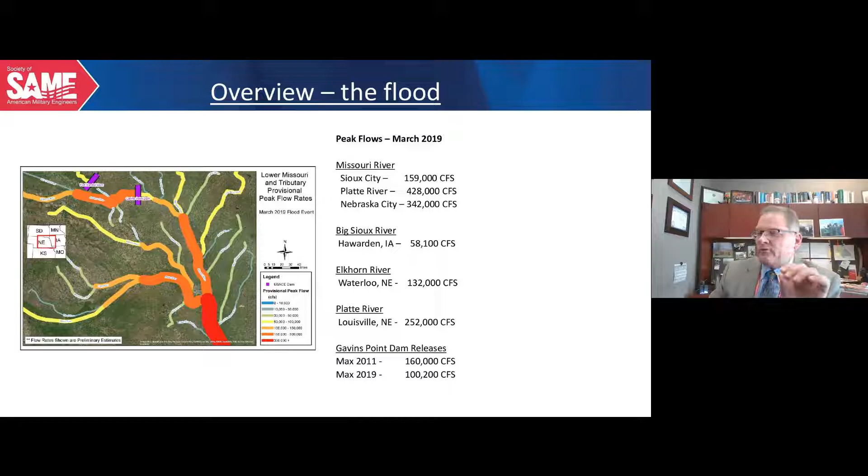The releases from the Gavins Point Dam up in South Dakota, which is the furthest south dam of the 6 main stem dams on the Missouri River, they peaked at 100,000 CFS. In 2011, they ran 160,000 CFS for months on end, but they're two very significantly different flooding events. The 2019 event was driven by unregulated flows in the tribs south of the reservoir system in Montana, North Dakota, and South Dakota. 2011 was largely an upper basin precipitation event where we maxed out the capacity of the reservoir system, a little over 63 million acre feet of runoff during that year, highest runoff year on record. 2019 was just behind that at 62.8. So basically the same amount of flow, but a significant amount of flow downstream.

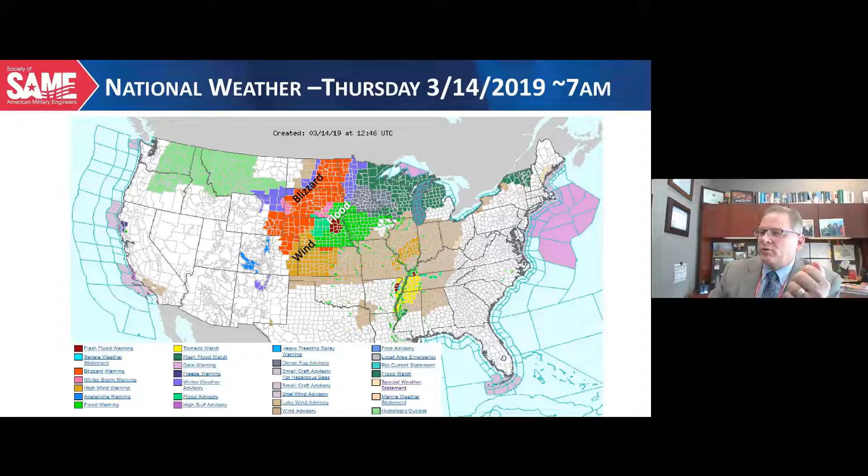This is going to kind of set up the precipitation event, and you never let a good event go by without coining a new word that you're able to apply to it. But this, we ended up with rain on top of frozen ground, on top of snow, the further north you got in our area of responsibility. And it ended up being what was affectionately termed as a bombogenesis by those people within the weather forecasting purview. So you can see, I guess some would call this a beautiful picture. I call it kind of ominous and frankly a little bit scary.

But as this weather track came up across the western part of Nebraska, saturating the frozen ground with upwards of 3 to 4 inches of rainfall. And then across the state of South Dakota, we ended up with significant bands of heavy, wet snow, all courtesy of starting on the 13th of March. I can remember on the 12th of March, Tuesday, the forecasts were, well, we could see a moderate increase in stage on the river systems.

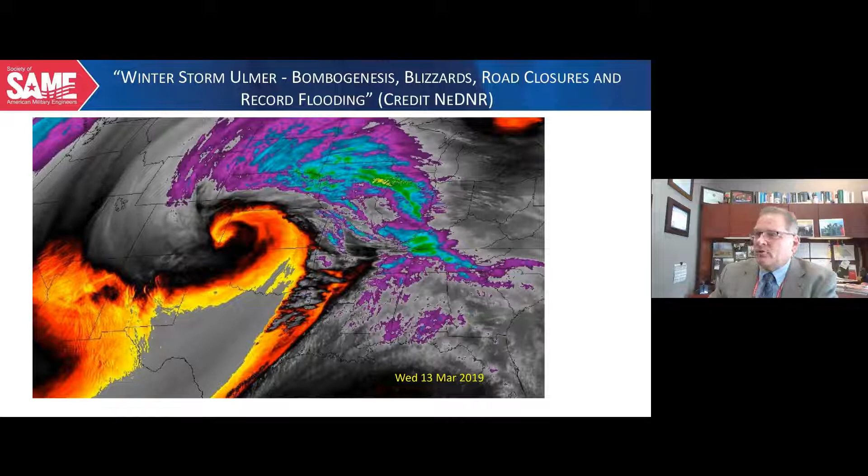And that dramatically changed over the course of about 30 hours, where we transitioned from it shouldn't be too bad to what became a very cataclysmic and just a catastrophic event that heavily impacted to the tune of nearly $1 billion worth of damage within a multi-state area.

This provides a QPF of the 3-day precipitation across Nebraska and South Dakota. You can see the dark tans are really indicative of a 4-inch amount of precipitation over very large areas that ended up providing significant inflow into the Missouri River system. Interesting to note that during the event, with the main stem dams at our disposal, we were able to terminate flow at Fort Randall on the Missouri River in order to try to mitigate and reduce the risk to the downstream event that we knew was going to be coming in through all the unregulated tributaries.

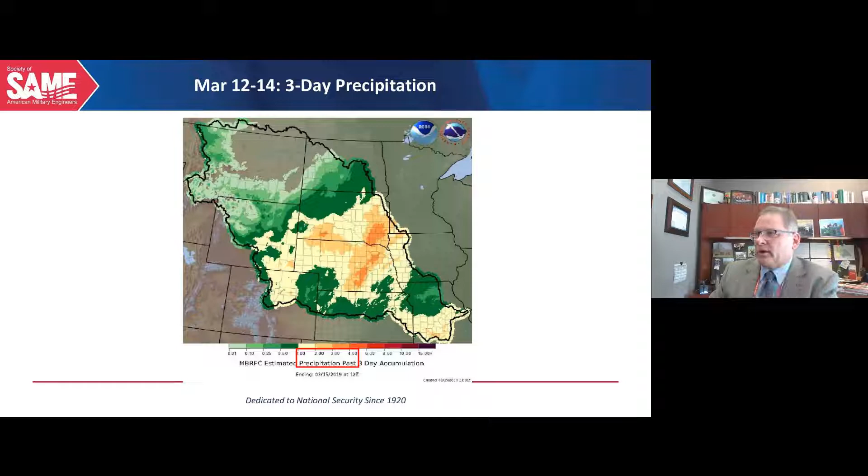So at Fort Randall, we minimized the amount of flow to zero, and then the rest of the flow was driven by the tributaries that came into the Missouri River system. So Ted? Yes, go ahead. You have the ability to shut off the Missouri River. Yes, we do. That's through those main stem dams. It's something that is very atypical. We've probably only done that during my career maybe twice.

It's not something that's obviously routinely considered, but this was I guess the classic event where downstream flows, our inability to control the flow in the Platte, the Little Sioux, Big Sioux, the Niobrara, forced drastic action, and we had the flexibility to be able to terminate that flow at Fort Randall. And basically over the course of the next 12 to 18 hours, you saw that tailrace from Fort Randall begin to decline and decline and decline as that flow cessation from Fort Randall began to take effect.

Unfortunately, the Niobrara flows into Lewis and Clark, which is above Gavins Point, which again forced Gavins Point to have to continue to increase flows up to that 100,000 CFS flow rate. Today's flow rate coming out of Gavins Point is around 13,000 CFS. A normal spring flow. We have transitioned to drought conditions. The irony of that should be appealing to many.

So we're in a situation now where we are reducing flows in order to protect downstream interests in water intakes and navigation responsibilities and those types of things. But we're currently running 13,000 CFS. So you transition from a system that's running 100,000 CFS to today's flow rate of 13,000. You can see why this was such a dramatic event during March of 2019. Understood. That's a factor of 8. Exactly.

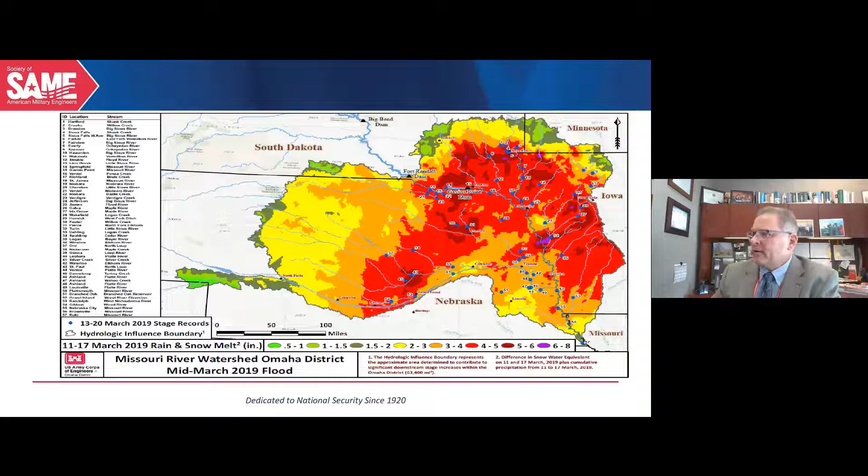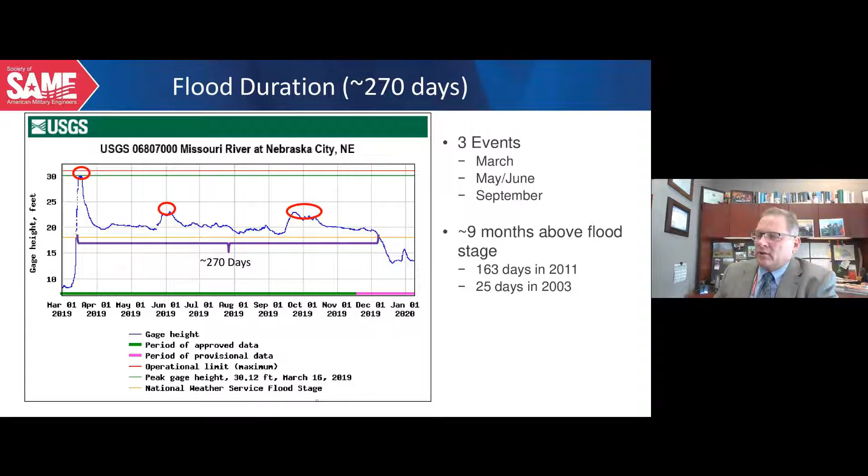And I really have to give accolades to local and state EM, to the Corps of Engineers. Certainly we were out there, boots on ground through the entirety, and many of the communities also rolled up their sleeves and they sandbagged and they provided a lot of those activities. You know, when you see water coming, it's really an all hands on deck type of situation. So now, once again, we're going to walk through and you're going to see a whole bunch of water. And really the takeaway is holy smokes.

But then I want to get to what the Corps of Engineers, what Omaha District, looked to do to try to do things differently. Breck touched on it at the beginning of the conversation. After the damages occurred, the 4 governors from the states of Nebraska, Iowa, Missouri, and Kansas came together and basically said, boy, we can't continue to do this every 9 years, every 8 years. We have to do things differently. We have to think differently. We have to think more resiliently.

And in this presentation today, I really try to focus in on some of those things that we focused on doing differently. At the end of the day, the federal government, through the PL 84-99 program, which is our opportunity to work with local and state communities to assist them in the management of federal and non-federal levee systems, we have a commitment to them that we very quickly work to repair damaged systems. And there's benefit cost ratios associated with that. There's a responsibility to be prudent stewards of the tax dollar.

Within that background construct, we're being pushed by the 4 governors to be able to do things differently and work within the construct of national law in order to get after that. So we had some great successes. We'll walk through those. I'm sitting up here in the green area, Omaha, Nebraska. Above Omaha, we did have some residual flooding, but it did not overtop the levee systems.

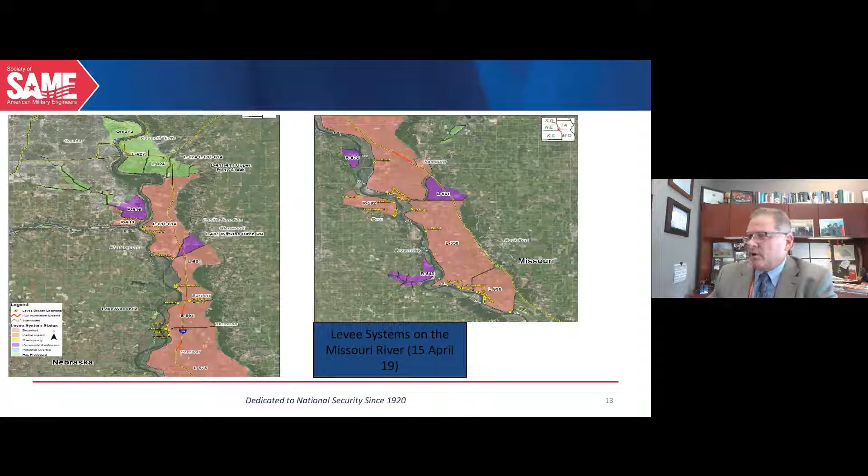So over the passage of time and months, this water flowed north to south and ultimately came out in L536. So for L536, we made a deliberate decision to pause for the better part of a year while the system was allowed to drain.

So I'm going to pause a little bit here and talk about some of the challenges, some of the impediments, some of the commitments that the Omaha District made as we met with the governors and really tried to focus on some of the pragmatic realizations. You're looking at people's livelihoods. You're looking at a lot of agricultural interests that were very negatively impacted. We'd just come out of the flood of '11. That was very catastrophic as well.

So within the ag community, between the 1st and 15th of March is an important time frame. That's when ag producers working with their insurance carriers really have to have the crop insurance defined. And if there are holes in levees, you can imagine that impacts insurance rates for that ag producer. So our commitment as we walked into this, and again, the water is still at the top of the levees. You really can't strategize and determine scope and extent of damages.

But walking into it, we said, you know what, within a year, we want to be in a position where all of the breaches, not only on the Missouri River, but also on the tribs. We had significant damage on the Elkhorn, on the Platte. We had damages across a vast swath of area that we were responsible for working with those sponsors to effect repair on. But with that being stated, our incoming goal was to ensure that we had the levee system plugged so that on the 1st of March we would have some level of flood protection.

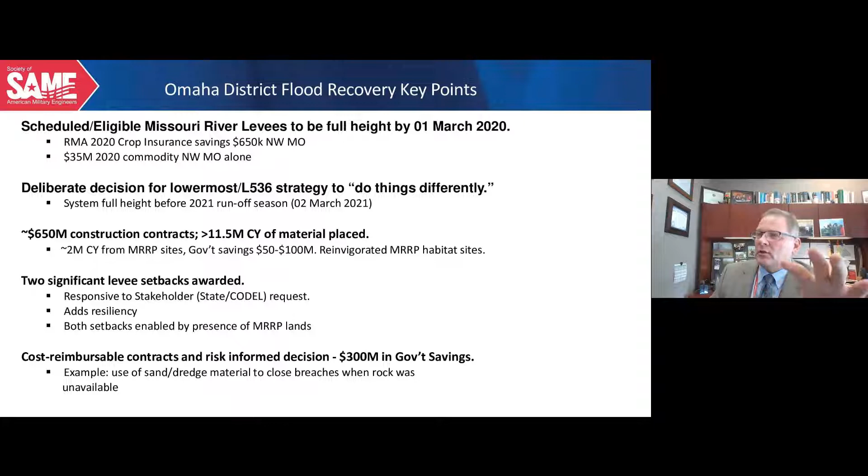Typically, within the federal government, you don't say use of cost reimbursable as a cost savings measure. Usually, it's been my experience over my career that when you get into an emergency and you're using a cost reimbursable vehicle, cost is secondary towards addressing the significant risk that is at hand. In this case, however, we were successful in using that tool rather than a traditional firm fixed price contracting approach in order to save the federal government money.

And then a lot of times when you have breaches to be plugged, you preface the breach with rock before you place material over top of it, cohesive and non-cohesive materials. Rock was a big problem. As you can well imagine, while we got hammered with our levee system, a lot of other industry, Department of Transportation with roads, we had heavily impacted interstate systems, railroads. BNSF was heavily impacted and largely bought up a lot of the local rock, which impacted our ability to go in and plug those 50 breaches.

So just a 100,000 foot perspective, in my career, we had the flood of 93, largely lower basin. We had some damaged levees within Omaha, not a significant cost. These aren't escalated costs, but still $84 million in 93, a significant chunk of change. 97 was a heavy flow year, didn't have any breaches within the Omaha district. 2011, as we talked, was pretty catastrophic.

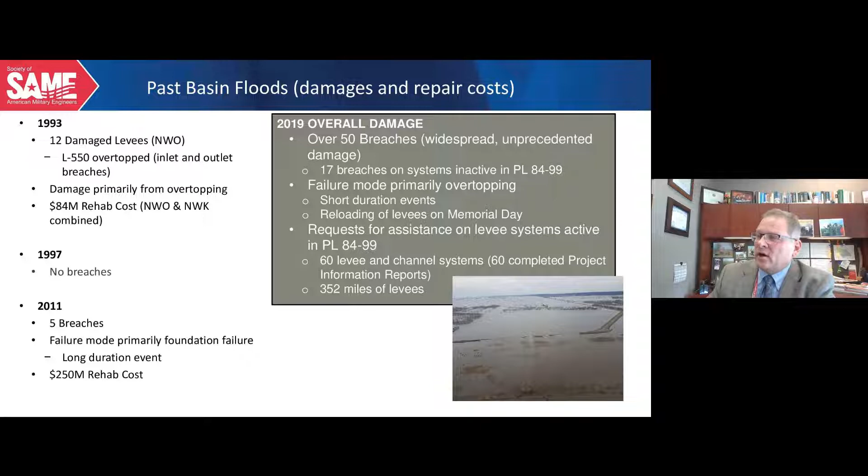Now a bunch of pictures and a bunch of gee whiz factoids. Again, you can see that this is the furthest north levee system adjacent to Omaha. It's just south of Council Bluffs, L611, 614. This is where the Platte River comes into the Missouri River. And if you look at a map, you can see it's kind of a right turn for the Platte. It says get to the Missouri, hang a right, go on down to the Gulf.

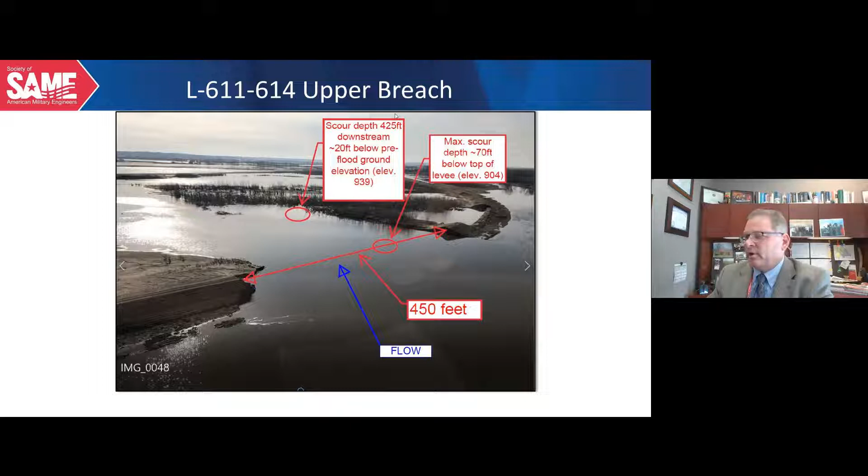Well, it was carrying around 250,000 CFS at the time of the peak point of the flood. We don't know for sure because all of the gauging stations were ripped out by the high flows, but it came powering through the Missouri and basically ripped through L611 levee system, left a lot of scour, deposited an incredible amount of material before it started making its way on the dry side, the landward side of the levee system, and proceeded to wreak havoc as it continued to go downstream, overtopping and breaching all the levees as it moved south.

Here's the initial breach. You see this kind of an eyebrow in the furthest left picture. The reason the Corps of Engineers does that is because you could go straight through, but the scour hole that is left is significant in nature, and it's easier, cheaper, and faster to make this eyebrow and put that in place in lieu of trying to pass through the significant scour hole caused by the event. Within 3 weeks of the flood event, we had already had contract awarded and contractors out there working. You can see them working on finalization and setting that breach repair in place within the other 2 pictures.

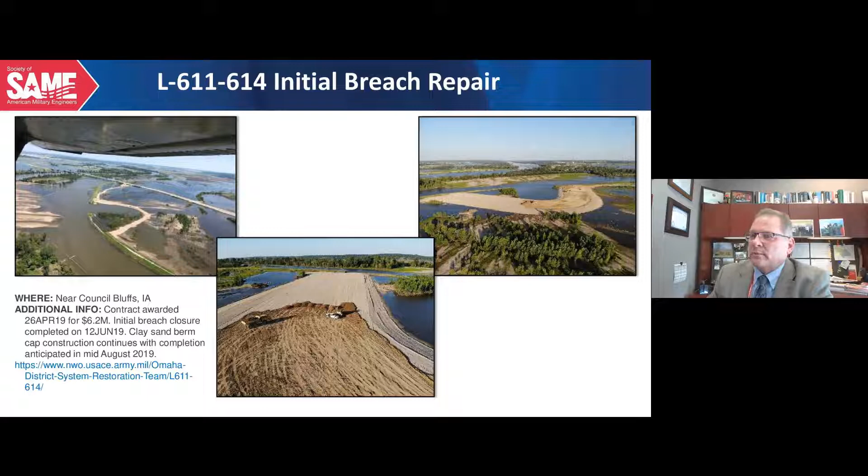Ted, you have a bunch of go-to contractors in this case then. Absolutely. See, we have what we call a rapid disaster infrastructure suite of contracts in conjunction with our rapid response contract vehicles. Seasoned, trained contractors, they acted in the prime capacity. What I find very interesting and gratifying is for this flood event, obviously a lot of significantly impacted ag community. A lot of the primes leveraged local capabilities, a lot of these local ag communities, and used their farming equipment to move the material necessary in order to effect repair.

Understood. So that was a great news story, really a win, if you can call any part of this devastation a win. It was working with the local communities and having those opportunities for them to be able to at least recoup a little bit of the damages wrought.

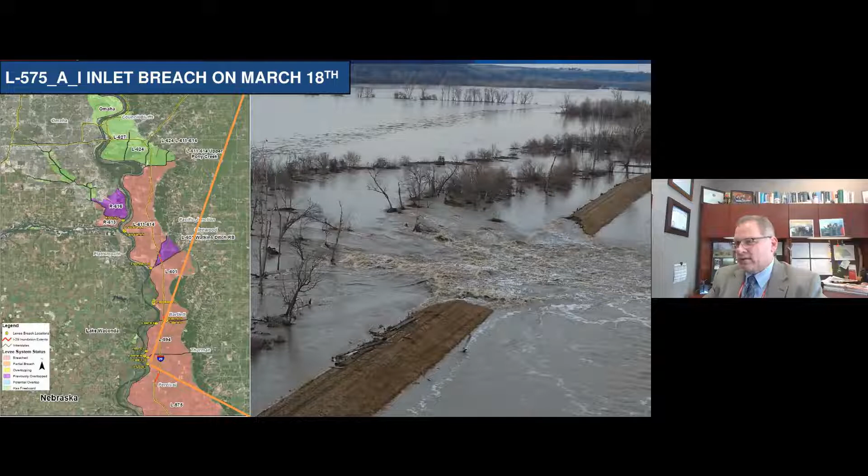You get a little bit further south, you transition from L611, 614, 602, you get down to L575, multiple breaches. In the left picture, you can see the 4 dots just to the left of Thurman. There's a tieback between levee systems at Thurman, and that's where you transition into L575. These tiebacks basically go on a tributary going up to the bluff. Both of the tiebacks were impacted and breached. So this shows a picture of some of that breach.

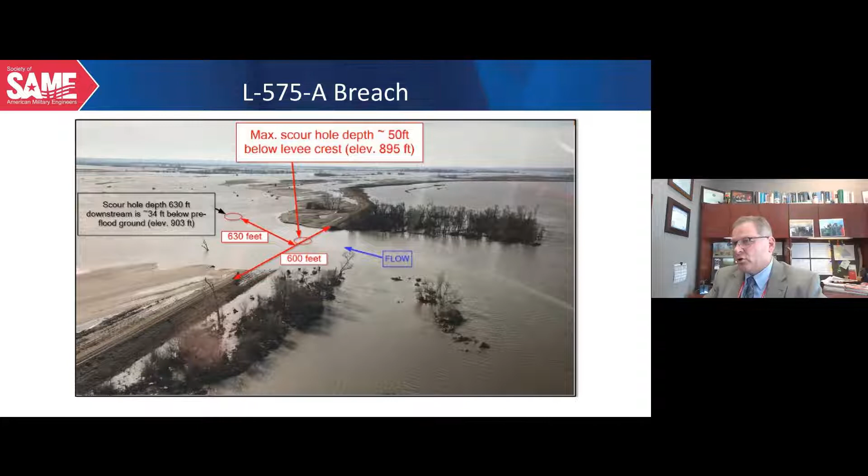You get a little bit further south into L575A breach, and again, they all got named. They were all worked on the basis of their priorities as we work north to south to try to effect repair as the system drained out. You can see in this case that scour hole was 35 feet below ground. Flow obviously coming from the Missouri into the breach, and then over the passage of time as the Missouri crested and went down, you saw the transition of flow from the dryland side out to the river.

This shows the initial repairs. The contractors are out there while flow is ongoing. We weren't in a position to wait for all of the high water to go down. We got out there and we're pushing sand and working in these communities. And it was interesting watching the final closure, because obviously you start squeezing flow, your velocities increase, and they're carrying the sand almost as fast as we were pushing the sand in. And then these sand berms are ultimately capped with cohesive material, which provided another opportunity for us to think innovatively about how do you place cohesive in the middle of winter. And we had some new innovative ideas that we provided as well.

The B breach has its own interesting story. During the peak of the flow, this B breach flow was the 3rd largest river in the state of Iowa. And when you got the Mississippi on the left bank and the Missouri on the right bank, you can imagine it was carrying a monumental amount of flow as it transitioned from the Missouri inland and then from inland back out to the Missouri. So very difficult breach to seal. Took a significant period of time.

We talked about those subsequent flood events that happened. This was heavily impacted by subsequent flood events. Contractors out there trying to seal the breach while the river's coming up as a result of significant rainfall events that occurred in the May timeframe.

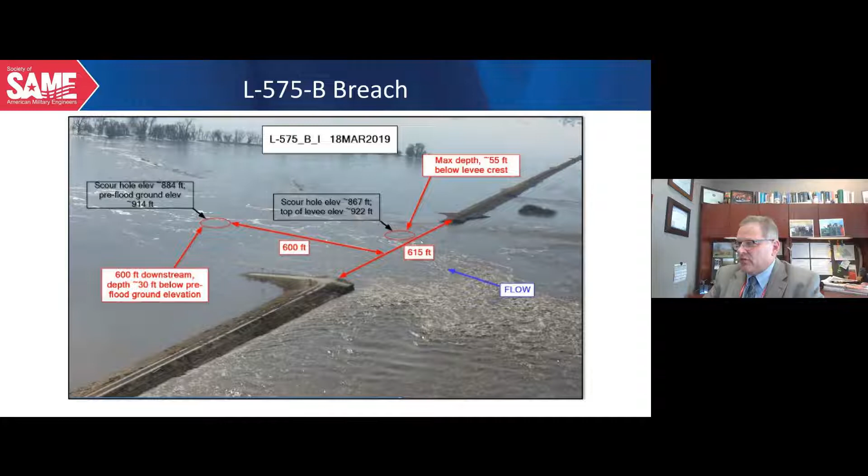This B breach, we originally awarded the initial closure in 19 April. So again, we're getting a little bit further south. This is a month after the event, and the contractor's working hard to begin the process. As you can imagine, you've got water everywhere. The entire floodplain for the Missouri River is the better part of 10 miles wide. So you basically got 10 miles of soggy.

So we ended up leveraging systems to be able to dredge and place material within the breach area from the riverside, because it was very difficult to access from the supposed dry side or land side. So this wasn't a question in many points of being able to truck in material in order to fill the breach. Some of these breaches we used dredge material, which was a very successful approach to get that initial plug in place.

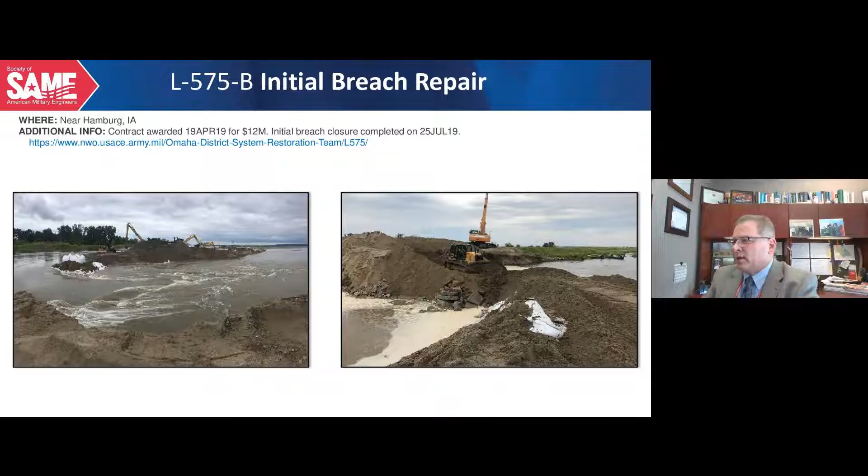Here's that final picture of the B breach, and you can see the, yes, go ahead. Basically, you took the sand that the river had spread about and put it back. Exactly. And then followed all of that up with a cohesive clay surfacing in order to prevent that sand material from eroding over the passage of time.

This B breach is kind of important to look at on the right picture. So the final flood event, the second rainfall event in September, which was incredibly wet, river's coming up. You can see it's out of its banks already, and it began to chew away at this completed breach area. So we put these chevrons and groins in place in order to reduce the energy of the flow, allow for deposition of material within those fingers in order to protect that investment of sand and time that we had put in place that would subsequently be capped during the winter of 2020 into 2021.

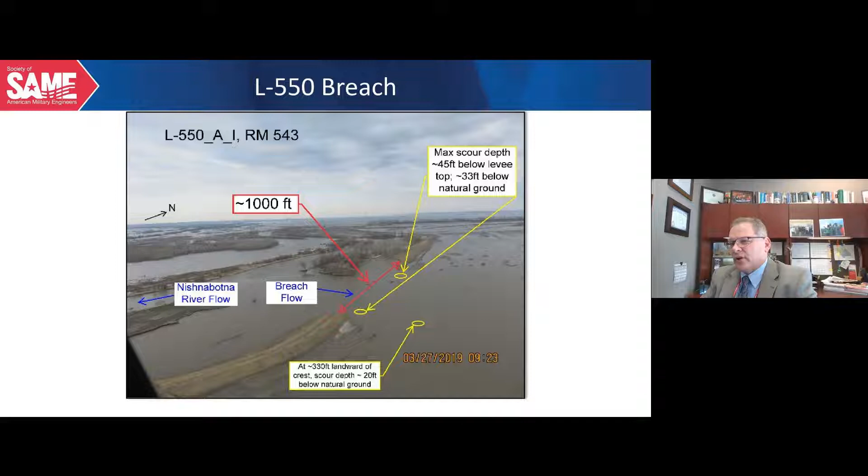We're almost all the way to the south end of the system. L550 was the second to last system that we worked, heavily damaged. We had 5 or 6 breaches just within the L550 system alone. Worked closely with state of Iowa, state of Missouri. We're transitioning into the state of Missouri down in 550. And 536 was exclusively state of Missouri. You can see, again, the magnitude of these breaches. Oftentimes very difficult to figure out what's the riverside as you look at some of these photographs.

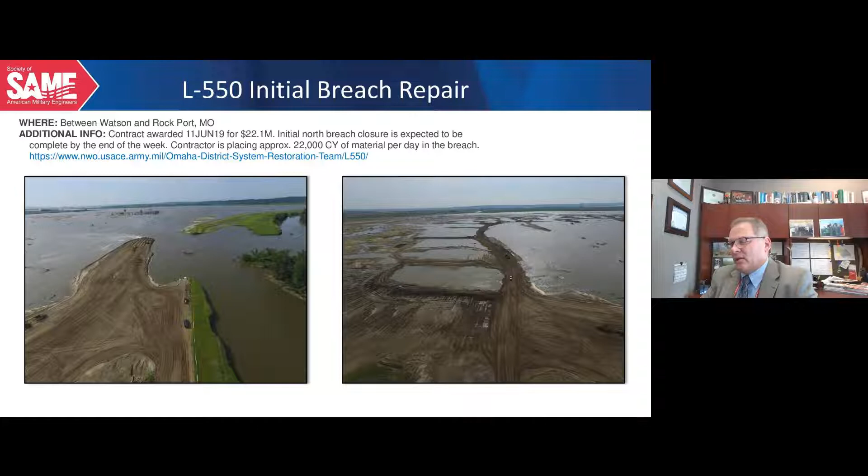Here, 550, you can see the breach repairs on the right after we've had the opportunity. And again, to travel along the crest of the levee was an adventure in and of itself. Very challenging, very difficult. You basically had to have your breach plugged in order to provide access to further south systems.

This is L536. No, it is 550 still. I'm sorry. Next slide's 536. But it shows the final area. You can see that a lot of the summer's transitioned. We're already into fall and winter. You can see snow on the ground. And once again, very proud of the fact that in 2011, we figured out that you could work in the winter in Nebraska and Iowa. We applied those lessons during 2019. It's hard to do. It's difficult to do.

We had a period of cold snap in February of 21 where we were running 10 to 15 below. And obviously, when you're trying to manage the moisture content within the clay material that's going to go on and it's all starting to freeze up, we tried to get after that through the use of some innovative approaches. We put up sprung structures and heated inside of those sprung structures and managed dirt within those sprung structures in order to make it workable for subsequent placement. So expensive, but when you start looking at time value of money and being able to effect repair quickly, vice having this stretch out over long periods of time, it became cost effective for us to continue these operations.

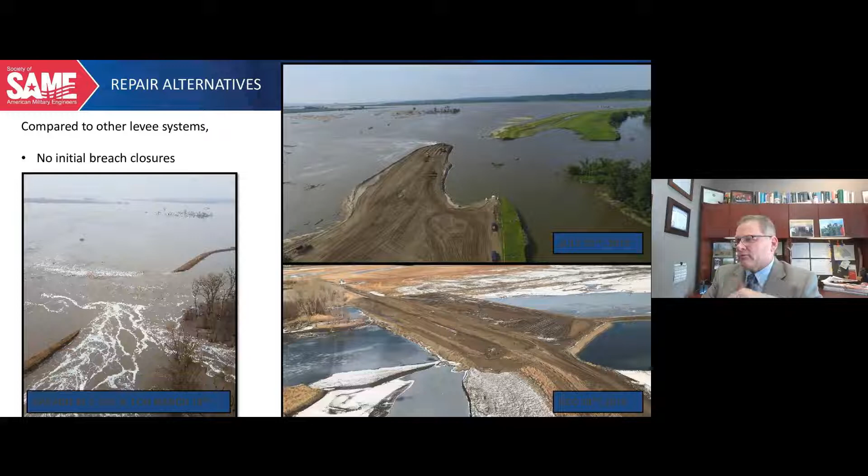Here's L536, and really it has been a poster child for a lot of success. We, in essence, moved the levee system back and allowed for the better part of 1,000 acres of what had previously been protected cropland to now be on the wet side of the levee.

And as you can well imagine, if you're the landowner who's being approached by the community or by the levee sponsor to say, hey, we got a great idea. We're talking about moving the levee back to give the river a little bit more room to grow because it failed in 93, it failed in 2011, it failed in 2019, we'd really like to try to do things differently. What do you think about us moving the levee and then you're going to have cropland that's not protected? That's not a very palatable conversation for those landowners.

So there became a long conversation with those landowners to figure out what can we do, what can NRCS do with some of their permanent wetland easement programs, what can the local communities do, what can the state do to supplement to ensure that those ag interests are not long-term negatively impacted.

Because it's been my experience that when you're on the wet side, if you're fortunate, you get a crop 3 years out of 10, because some of these areas will still be cropped. And basically the ag community is hoping that it's a moderate moisture year that allows them to be able to gain harvest, versus on the dry side, it's supposed to be one of those situations where they can count on production 10 years out of 10.

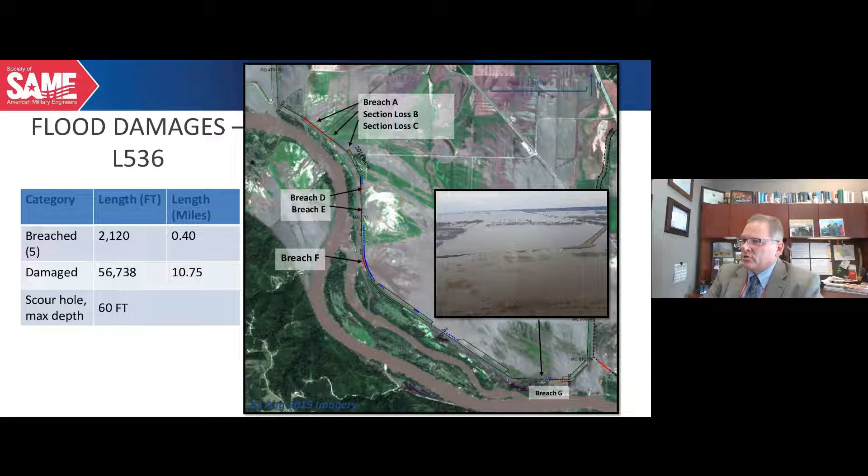And the next picture, I think, shows an overview of this offset or this setback. And on the right picture, you can see the original levee configuration adjacent to the river, tight constriction on the river, to the setback, which provided the opportunity for the river to have access to the floodway, and gives it a little bit more of an opportunity to carry additional flow. All of this within the construct of the PL 84-99 program.

The way we were able to do this was to look at the cost of repair along the original alignment. That has to be contrasted with the cost of construction for this new setback, and the costs have to be equal. You can't spend more on the new system setback than you could on the original repair. That was an important lesson learned.

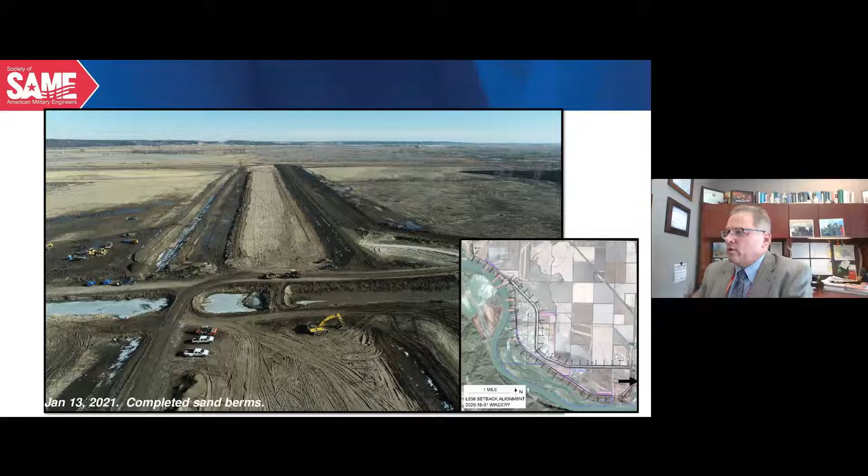We worked very closely with our higher headquarters in Washington and in Portland to ensure that we were in conformance with law and that we're meeting the authorized purpose of this levee system. And it became a huge success. Once again, working with Nature Conservancy, they did a lot of the heavy lifting, working with the ag community and the landowners, and ultimately we were successful in getting that setback.

Some more of the lessons learned. When the flood of 11 happened, it was all hands on deck. How are we going to get after fixing this? And within Omaha District, what I did is I took a cadre of staff and basically established a brand new branch within the project planning and management group that I called the Omaha System Restoration Team.

And it's a matrixed organization where I have staff from construction and engineering and contracting and counsel and everybody that is necessary in order to execute the mission had a devoted responsibility, in that case for the better part of 18 months, in order to ensure that we have provided the devoted attention necessary to accomplish a significant lift. In that case, it was $500 million.

So unfortunately, when 2019 came and the flood was ongoing, I knew exactly what needed to be done, which was System Restoration Team version 2. So we incorporated some of the lessons learned that we had gone through with the SRT. A lot of lessons learned with respect to real estate and management of real estate. Real estate is a levee sponsor responsibility, and can oftentimes be the long pole in the tent in terms of gaining access to the project site.

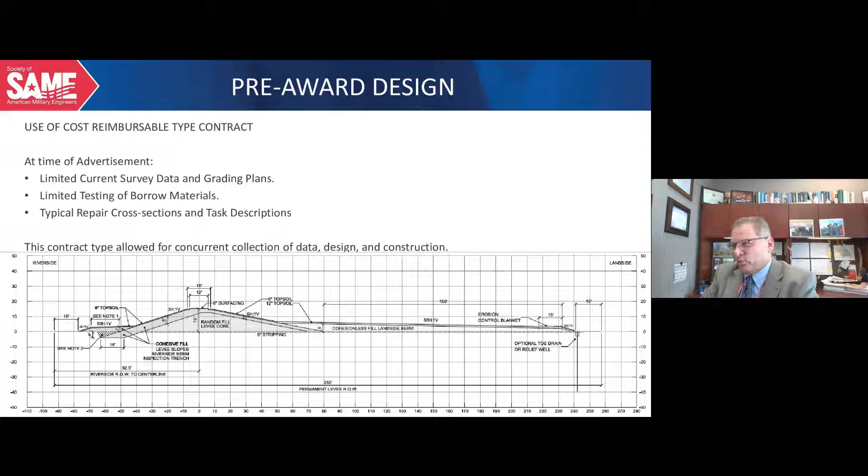Working with NRCS, they've got their own set of processes, right? You're basically marrying two cultures, Corps and NRCS. They were so super to work with. They committed to working with us. We had high-level conversations with Washington, D.C. staff and leadership in order to figure out how we can leverage and marry their program, which takes longer than what we were asking them to do, and make it effective for what we needed to accomplish. And they bent over backwards to work with us to make it win-win. And again, you can see many agencies, a concerted effort to set that levee back and provide more room for the river to go.

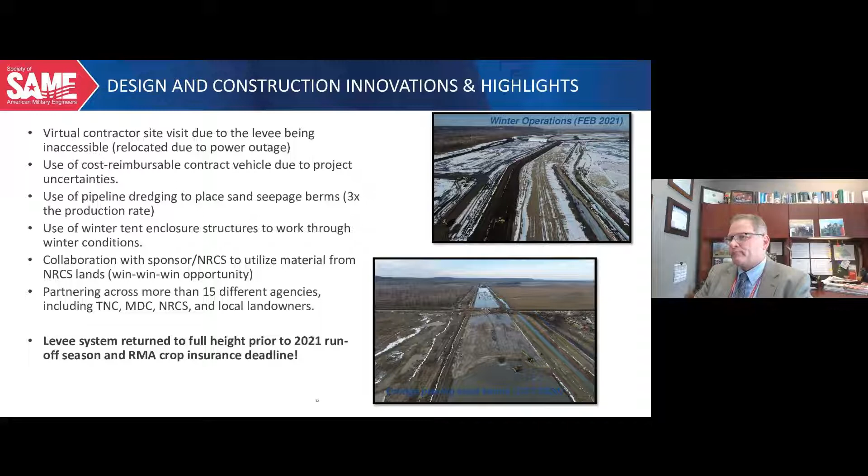So you've got the pragmatic hydraulic considerations of giving the river more room to roam, but you also have the environmental impacts and benefits associated with greater diversity. A significant part of the Missouri River Recovery Program talks about the mitigative responsibility of the federal government caused by the Bank Stabilization and Navigation Program, which channelized the Missouri River from Sioux City south down to the mouth. Part of the federal government's responsibility is to mitigate for the damages caused by that activity. So at L536, you talk about 1,000 acres of reconnected floodplain. You talk about seeing greater diversity, fish, amphibians, birds. It's real. We've seen it in just a very short time since we were successful in doing the setback.

And from there, again, a lot of information. I am very excited about the success that we've been able to leverage working with a host of different people, a host of communities in being really in a position to invest the nation's dollars. And I'm very serious about the investment of basically $750 million to effect repair on this levee system.